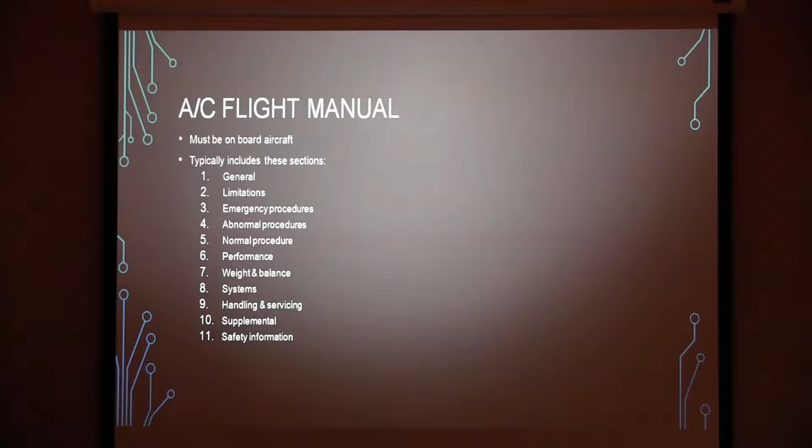Two big ones are going to be the limitations and weight and balance. If any of those values are exceeded, then bad things can happen. Potential. So, getting to limitations, here's a lot of numbers and stuff that we're going to talk about, but these are our airspeed limitations for the C90B.

So we got VMO 226, it's your barber pole, that fluctuates with altitude. Your maneuvering is 169, VFE we talked about, 184 for approach, 148 for full down. VLO, VLE are both 182. Your VLO for retract is 163. VMCA is 80 knots, we got a red line on the airspeed indicator.

Stall, clean configuration is 88 knots. And your stall speed with landing configuration 78. VYSE, single engine VY, is 108. You got a blue line there.

Engine operating limits, right out of the POH. We've got starting limits. Max observed ITT for starting is 1090. Okay? And then we've got a little note that it is limited to 2 seconds. So for starting, the ITT goes up to 1090, 2 seconds max, and then we got to shut down or stop the start. Oil temp must be at -40.

There's low idle, high idle. These values are somewhat important, but takeoff and max continuous power, we'll get 550 horsepower. Torque max is 1315. Max ITT 695. Oil temp 10 to 99. And pressure, we want 80 to 100 here.

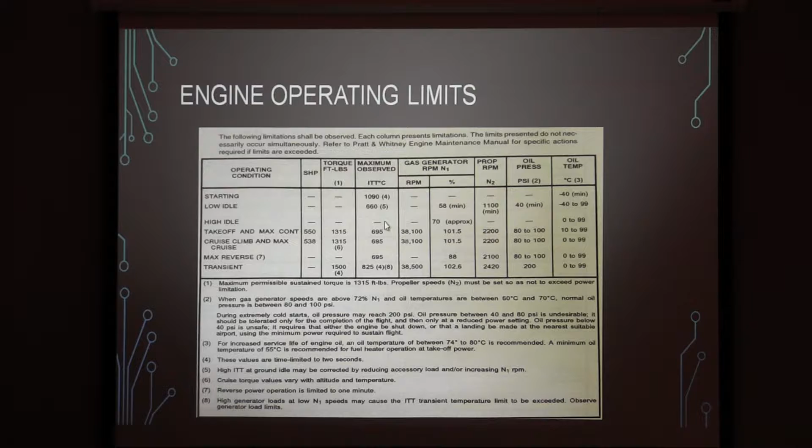Where is that one note? I guess they don't have it in here. They do have a recommendation that the oil temperature is at a minimum, I believe, of 50 for the takeoff. Is that right, or is it 55? Number 3. Oh, number 3. Yeah, okay. 55 degrees is recommended for fuel heater operation at takeoff power. So, cold days, quick taxi down, you might not get that. So, anyway, 1090, good number to remember.

Generator limits. So, in flight, we can have 100% gen loads as long as we have a minimum N1 of 85%. On the ground, things get a little different, where if we have a 0 to 50% generator load, we have to have a minimum 59% N1. Anything above 50 to 80%, we have to have a minimum of 61%, and anywhere from 80 to 85, it's at 70% N1. Obviously, we use the condition levers to increase that N1 if needed.

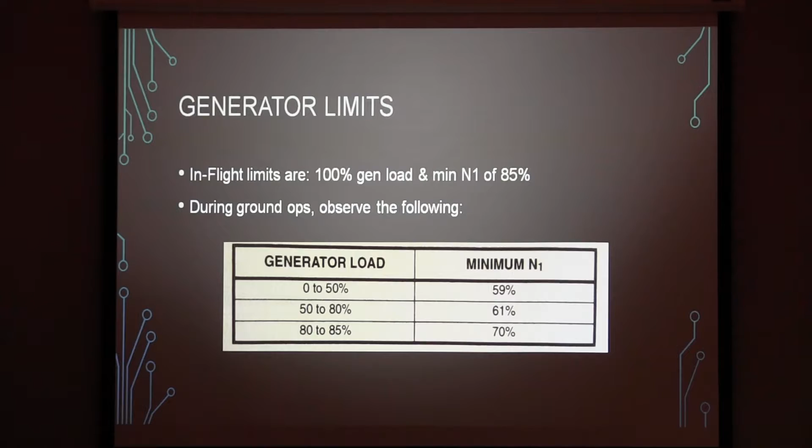Fuel limitation, we use Jet A. It says we can use aviation fuel grades in an emergency. Operation is limited to 150 hours between engine overhauls. It's also limited to 8,000 feet or below with boost pumps inop. Cross-feed capability is required for climbs above 8,000. All those limitations have to be watched.

Anti-icing and biocide additives can be used, but we have to refer to the POH and the maintenance manual. The POH really doesn't say much about the percentages, but that's the things we need to refer to.

If we have a left fuel pressure or right fuel pressure annunciator illuminated, basically that's a boost pump failure, and we verify it's a pump failure. The operation is limited to 10 hours before an overhaul or replacement of the engine-driven fuel pump. And the boost pumps must be operational prior to takeoff. So back up to this guy, if you have a pump failure, you can't land, drop somebody off, hop back in the plane and take off again, because they have to be both operational prior to your takeoff.

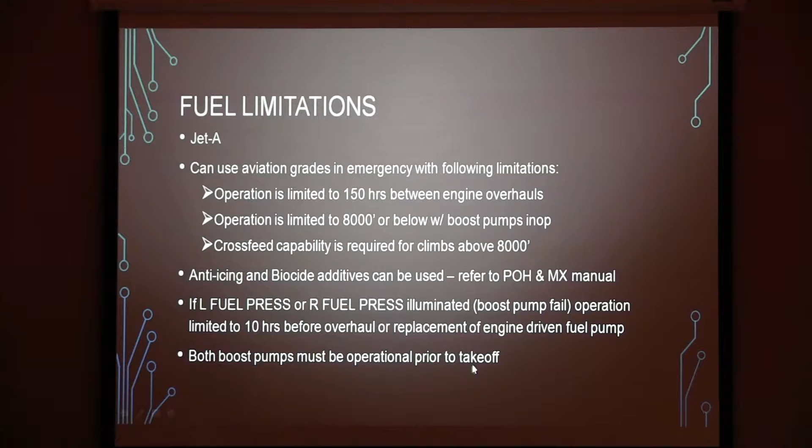Total usable, we have 384 gallons, which equates to 2573 pounds. Each side we have 192 gallons, or 1,286 and a half pounds. Each wing tank carries 131 gallons. Nacelle tank carries 61 gallons. Full fuel, if we needed to get that, we'd fill the nacelle first, then our wing tanks.

Steve kind of mentioned that a little bit. Max imbalance is 200 pounds, a lot less than the 1,000 pounds for the 250, but that needs to be observed as well. Cross feed is permitted only in the event of a boost pump failure or an engine failure. Both of these are automatic. We really don't do much about it. We do have the option to manually override stuff, but typically it's all automatic.

We can't take off with the fuel gauges in the yellow arc, which is below or less than 265 pounds in each wing. And obviously the yellow arc is on the fuel gauges themselves.

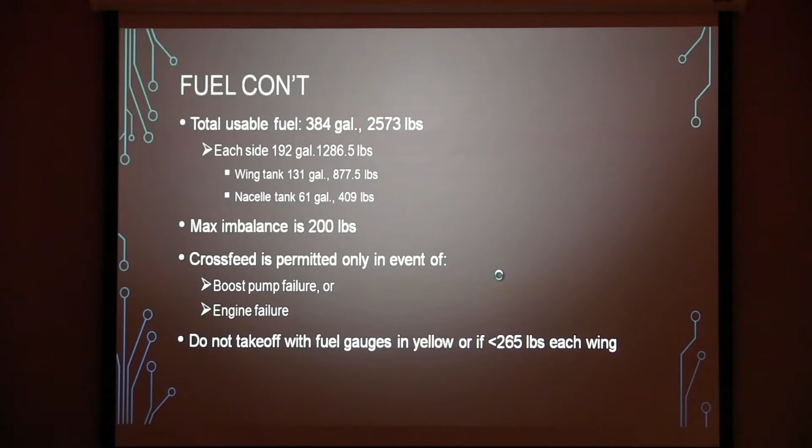Power plant instrument markings. Okay, we've got ITT, green 400 to 695. 695 is a red line, but we also have another red line or a red diamond, depending on the model year or production line, at 1090. Torque 0 to 1315 is green, red line at 1315. TAC, we have normal 1100 to 2200, red line at 2200.

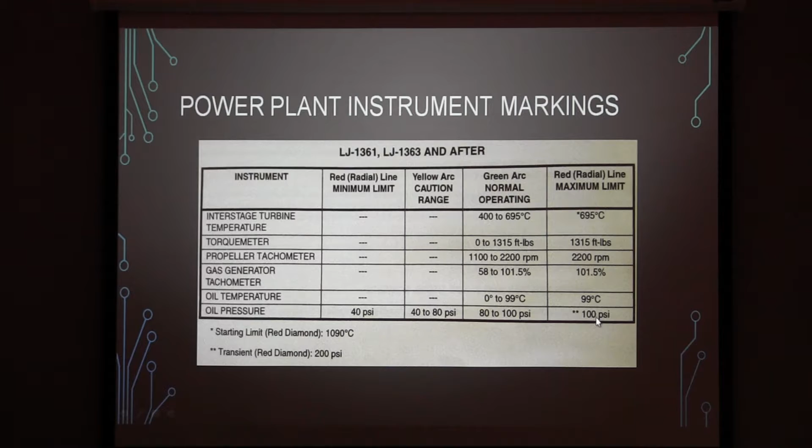Gas generator, our gas generator tach, your N1, 58 to 101.5, and then 101.5, you got your red arc. Oil temp, 0 to 99 is the green. Oil pressure is 80 to 100 PSI. And then we've got the red line, or red diamond at 200 PSI as well as the 100 PSI.

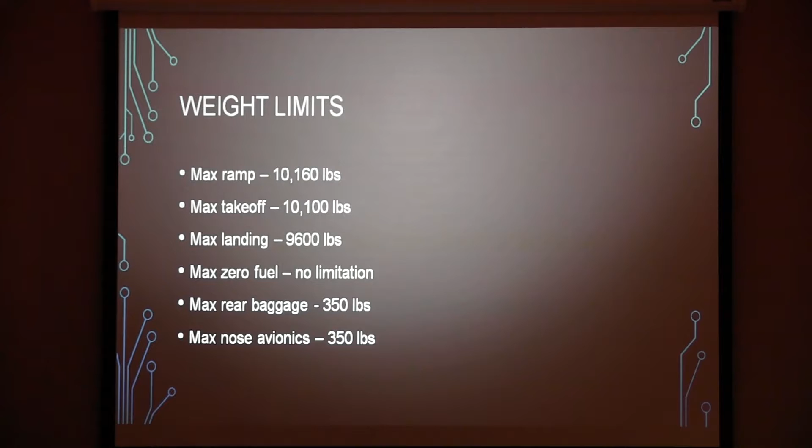Weight, a little bit different. Steve had the 90As, but 10,160 is max ramp, takeoff 10,100, max landing 9,600. We have no limitation on zero fuel. Rear baggage is 350 as well as the nose avionics bay. But this rear baggage weight limit would include a passenger if he or she is sitting back there. As well as the nose avionics bay, that includes not just baggage but also all the stuff in the nose compartment. Plus a person if you shove them in. Yeah, plus person. You gotta stay low enough for that.

Icing limitations. We have a minimum speed of 140 knots. Minimum temperature operation for our de-ice boots is minus 40 degrees Celsius. That's really, really cold, but there's a limitation. Engine anti-ice, if we cannot assure free of visible moisture, anything from plus 5 degrees Celsius and lower, we need that engine anti-ice on. Sustained flight in icing with flaps extended is prohibited except for your approach and landing. They just will accumulate too much ice sticking out in the air like that.

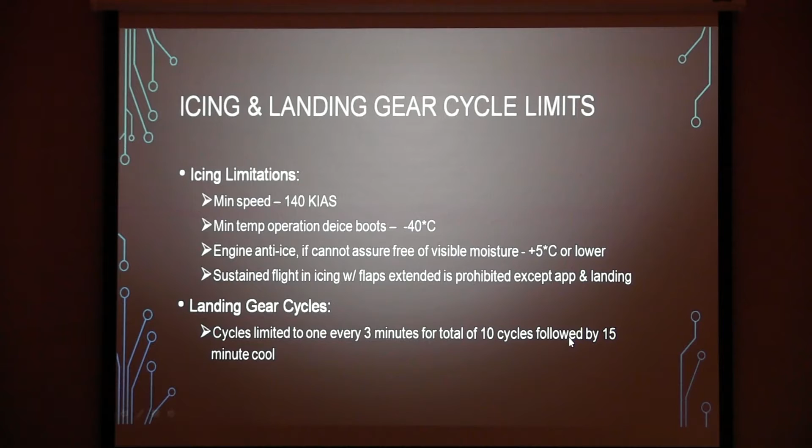Landing gear limitations. Cycles are limited to 1 every 3 minutes for a total of 10 cycles, followed by a 15-minute cool down. I don't know why you would do that, but that's the limitation. And then some miscellaneous. Max operating altitude, 30,000 feet. Max outside air temp is plus 37. It looks like it's a negative, but it's plus 37 degrees Celsius. Max cabin differential is 5.1 psi. Max pneumatic pressure is 20 psi. I probably should have used commas or something other than the little dashes.

Anyway, external power limits. If we need that external power, it's got to be at 28 to 28.4 volts and be capable of a minimum of 1,000 amps momentarily and 300 amps continuously. And then we have our starter limits, 40 seconds on, 60 seconds off, 40 seconds on, 60 seconds off, 40 on, and then a cool down of 30 minutes.

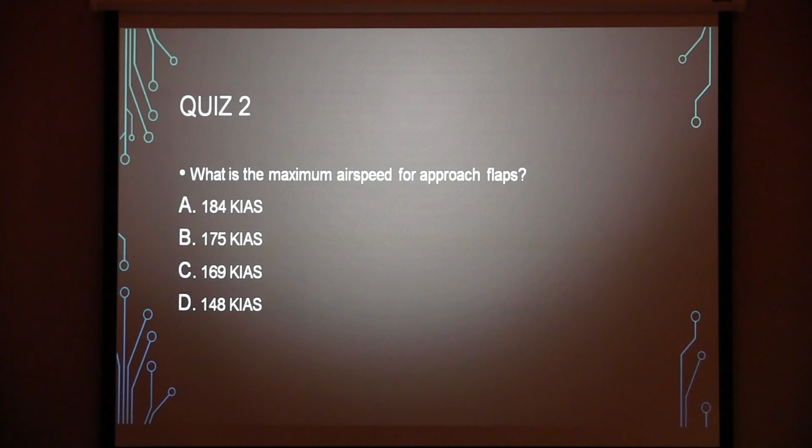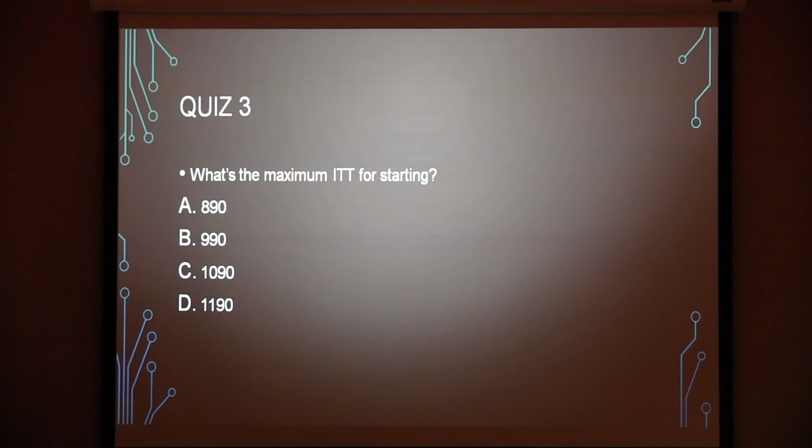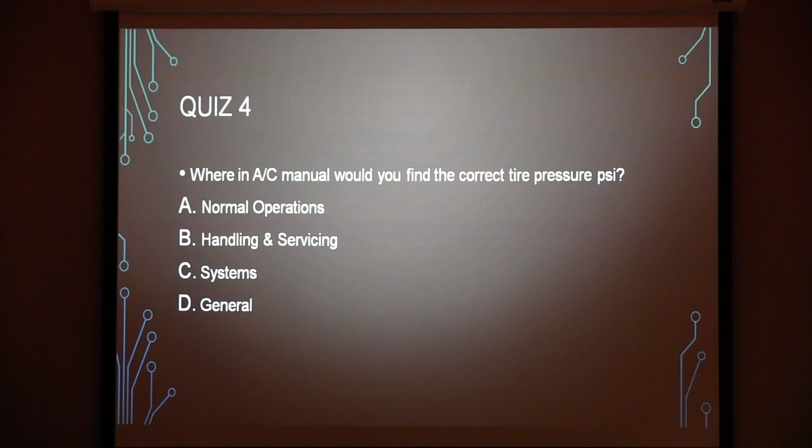I forgot to tell you this. Where do you think in the aircraft manual would you find the correct tire pressure PSI? And what is the time limitation for an inop boost pump? 5 hours before replacement, 10 hours, 15 hours, or 20 hours. So 5, 10, 15, or 20.

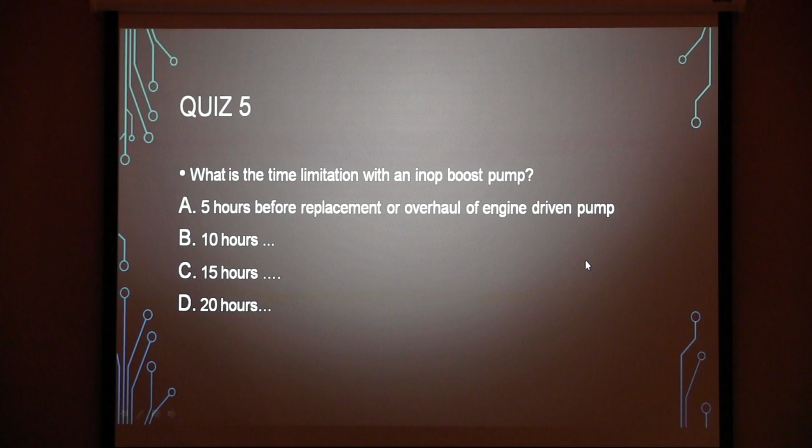B. The baby. Blah, blah, blah.